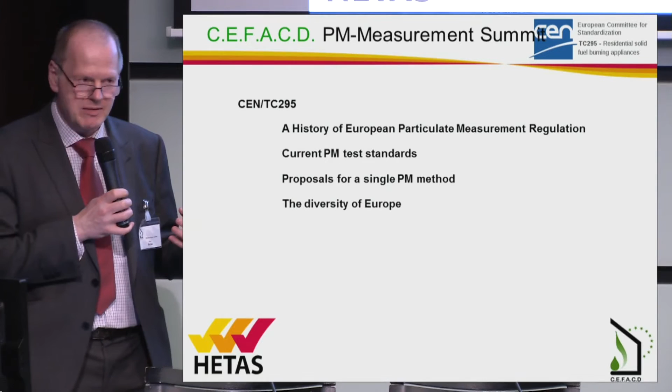This presentation is really a look at where we've come from to the stage where we are with standardization at the moment, and why we've got so much diversity in the methods that we've currently got, and how we can move forward towards a single method and the challenges that are being presented to actually get a single method.

So I've looked a little bit at the history of regulations across Europe. I've asked for feedback from, we have 3 national methods, the UK, German and Norwegian, so we've had some feedback from members from Germany and Norway on theirs. I've a lot more information about UK because I know UK in a little bit more detail.

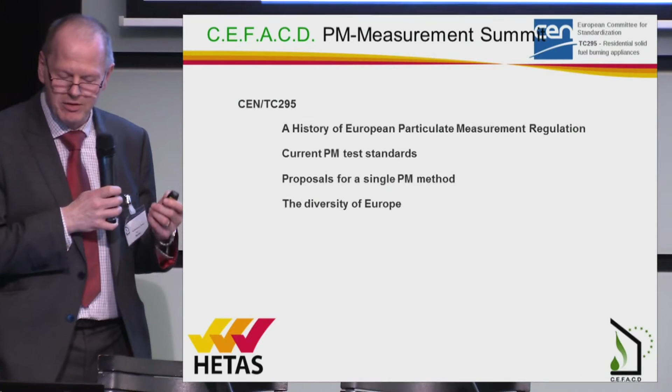But from the national regulation side in the United Kingdom, we've got probably a lot of history going back on air quality problems and actual regulation of air quality, to the point that this isn't something new, even though we've looked at the slides just a few minutes ago from Marlon, which showed from the 1970s some massive improvements.

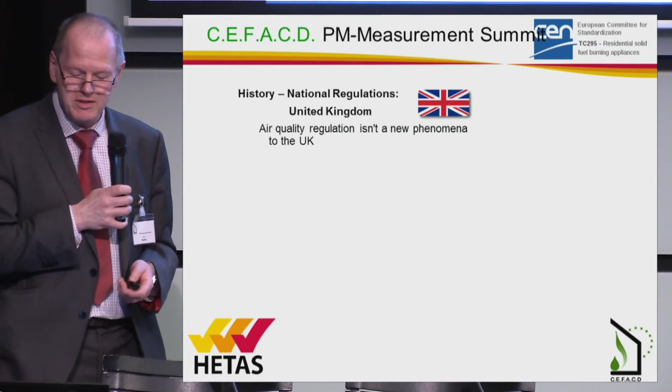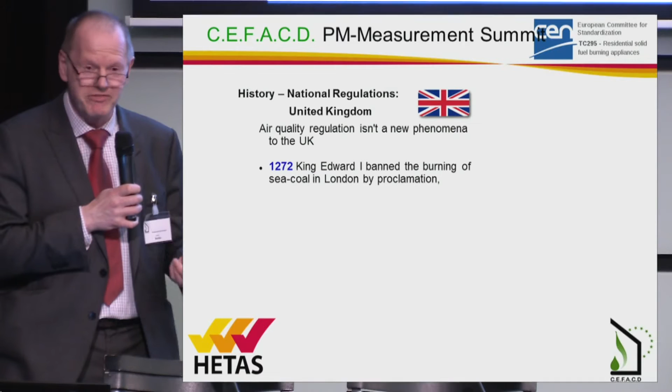The first regulation I found in the UK actually dates back to 1272, when King Edward I banned the burning of sea coal in London because of the really acrid and nasty smells and burning lungs that people were getting from the emissions. Sea coal was basically coal that was brought down from the north of England from coal seams that had been exposed by coastal erosion, and it was very tarry, bituminous coal. So that was the first regulation that we can find on air quality.

We then had some information coming from John Evelyn, who was an advisor to King Charles II in 1661, who produced a booklet, Fumifugium, or the inconvenience of the air and smoke of London dissipated. And this actually gave some very useful information that they should relocate industry out of the city centres and start planting parks and trees to clean the air, which reflects in a lot of the cities now.

They're not just concrete jungles anymore. They are quite urban parklands and avenues of trees that we see all across Europe, not just the UK.

The one thing he got wrong was that he suggested that burning of wood was less damaging to your lungs, particularly aromatic woods. What it was in those days, they could see black smoke and they could see a problem. What they didn't know was there was problems with invisible particulate that you can't see in the air, which is what we're now regulating down to.

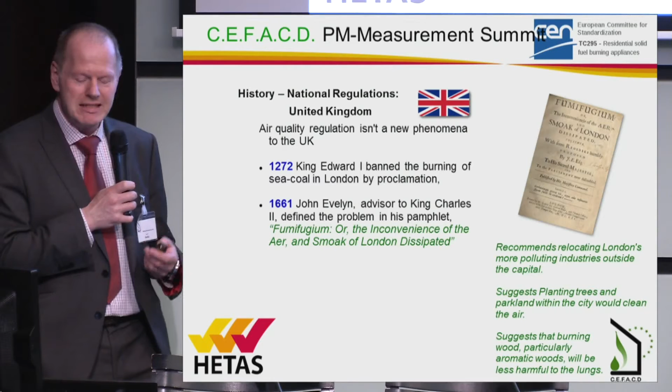You can't see what comes out of the chimney at the emissions levels that are being tested for throughout Europe at the moment. And also in 1853, with the development of technology, the Marquess of Lansdowne brought in the Smoke Nuisance Abatement Metropolis Bill, which was basically that all furnaces should consume their own smoke. And this was after researching the development of down burning, so it wasn't just basic burning in furnaces and fireplaces anymore. They were requiring some technology.

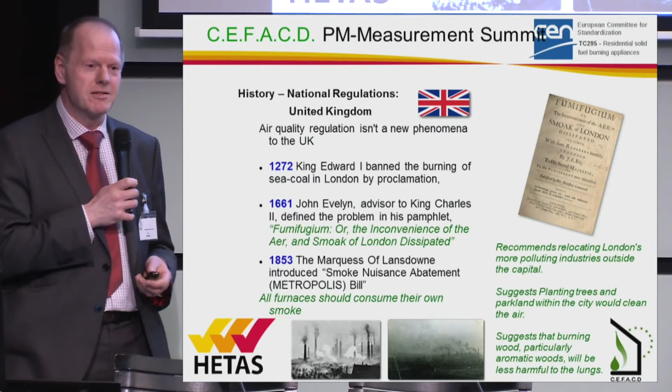So it hasn't all advanced since 1970. There was work being done previous to that.

We'll look at the national regulations of each of the 3 countries. And in the United Kingdom, before we go on to that, we suffered a devastating period in 1952 where over a lot of England was a weather inversion which held the pollution down closer to the ground level.

That mixed with moisture and damp in the air, and it was a time when we had masses of coal burning. All domestic heating was mainly open coal fires or very early stoves, which were just a box with primary air. But we had the situation where the air became so polluted during these smogs that literally thousands of people were killed during the smogs.

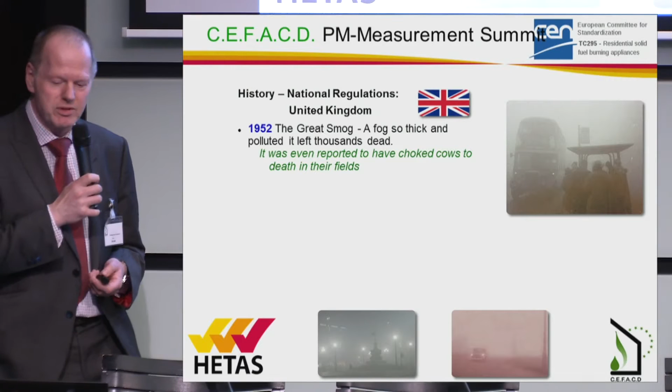It was reported that even cows in the fields around London choked to death. The air was that bad. But that prompted us to introduce the Clean Air Act in 1956.

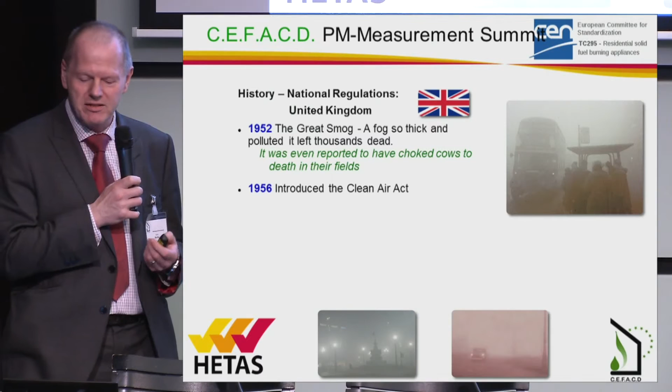And on the back of the Clean Air Act, which was legally binding across the UK, we introduced a requirement where you weren't allowed to emit dark smoke, so only white or light grey smoke. But it was still a visual situation. They were still talking about smoke you could see.

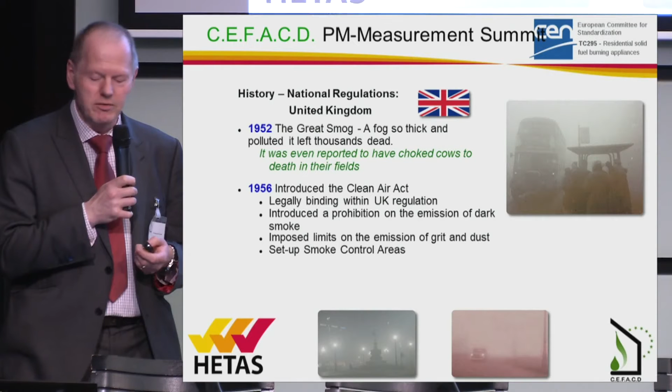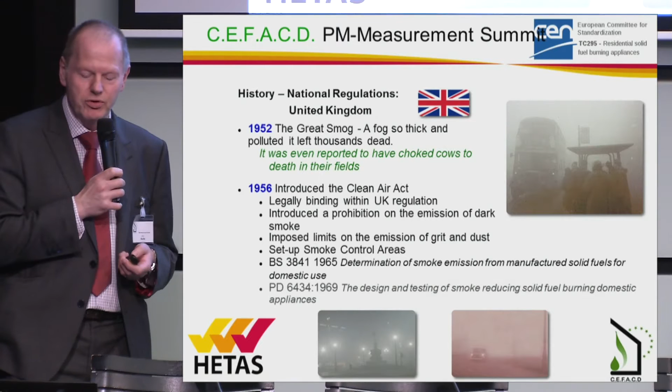There was emissions of grit and dust imposed on what could come out of appliances. Set up smoke control areas where there was tighter regulation on all combustion appliances, and it prompted the development of two standards in the UK, 3841 and 6434, which set out how you actually tested an appliance.

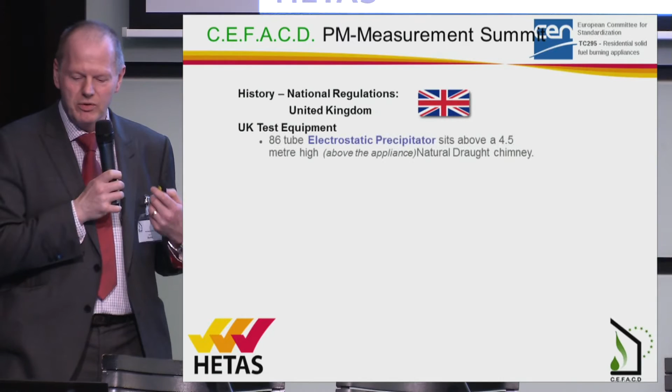And these were simply, after research of equipment, they chose as the primary method an electrostatic precipitator taken from the chemical industry, because it was known to have very high capture efficiency and capture a lot of the pollutants coming from chemical plants. Some of the really nasty stuff was being used.

It was sitting on top of a 4.5 metre chimney, and at the top of the chimney, because of the thermal mass and the air leakage through a typical ceramic British chimney, the temperature had dropped to around 80 or 90 degrees before it entered the precipitator.

So it was capturing a good portion of the condensed hydrocarbons, the volatile organic compounds that are gases that don't condense until the temperature's low enough to form organic particles. And the efficiency of it was around 97 to 99% efficiency, so what's coming out the chimney is being caught, and it gives you a very good reflection on the appliances.

The limits that are set in the UK reflect the fact that you're capturing all of the smoke, not just a sample of the smoke. And there's also an optical trace which tells you when the smoke is being created within the combustion cycle, giving you a graph of where the smoke is created.

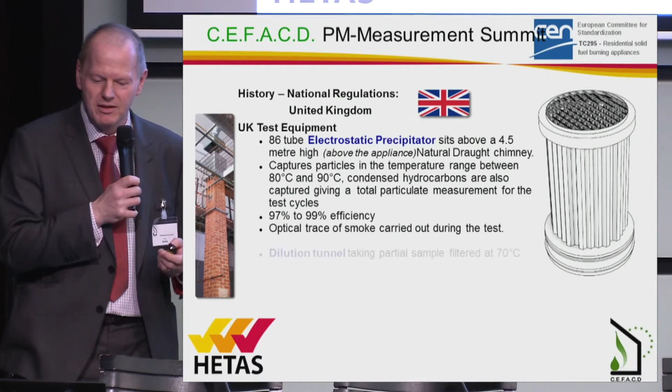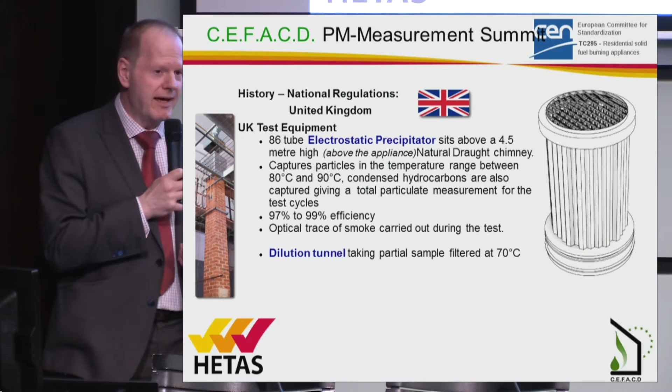There is also a dilution tunnel in the UK that's used, that takes a partial sample of diluted air, and the filter housing is maintained at 70 degrees, but the air is diluted down colder than that through the dilution tunnel. It's isokinetic because you can have higher velocities in a dilution tunnel than a natural draft chimney, so you're sampling relative to the flow of the exhaust gas going through the chimney, and the results are fairly comparable between the two methods. So either will satisfy the UK smoke control requirements.

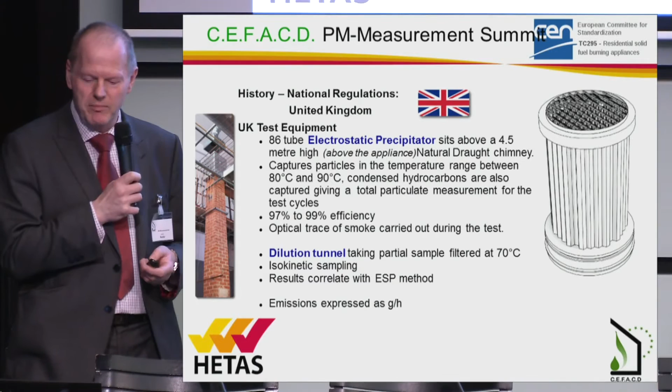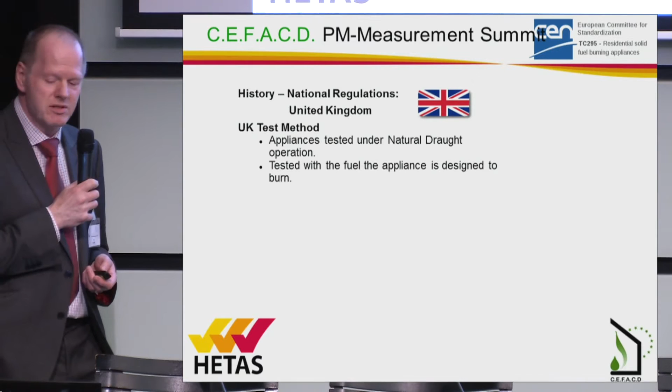The method we use to test the appliances is they're tested under natural draft operation, with the fuel that the manufacturer declares the appliance to be used with. So if it's a logwood fuel, it's tested with logs, and it's tested at the maximum output the manufacturer declares — the fuel load they say is the maximum for the output of the stove.

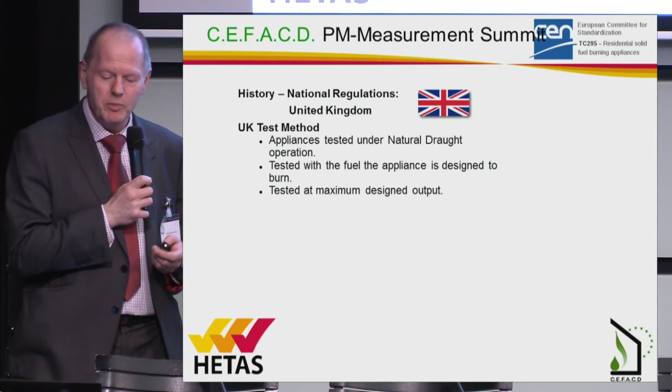But we have a culture in the UK of trying to outdo our neighbours. We live in relatively modest housing because we've got an awful lot of population in a small area. So most of the houses are fairly small, but the culture is to have as big an appliance as you can, for a nice big glass front on it, and something that looks better than your neighbour's got.

So there's almost always an oversized appliance fitted, which means they're usually operated at a very low turn down position, and if you have your air too low for the fuel that's in the firebox, you create a lot of smoke. So the requirement under the Clean Air Act is that you have to test them at the physical minimum position that the air can be set for the stove, making sure at the minimum setting you've got enough air to maintain the clean combustion that the Clean Air Act calls for.

If during the testing process you're fairly near the limits, you then have to do an abuse test and put even more fuel in and do the tests — so you're overfiring the appliance as well. And to get some degree of repeatability, they actually do 5 tests of each of the firing conditions, so it's not just a one-off freak result giving you the results. There's some robustness behind the testing.

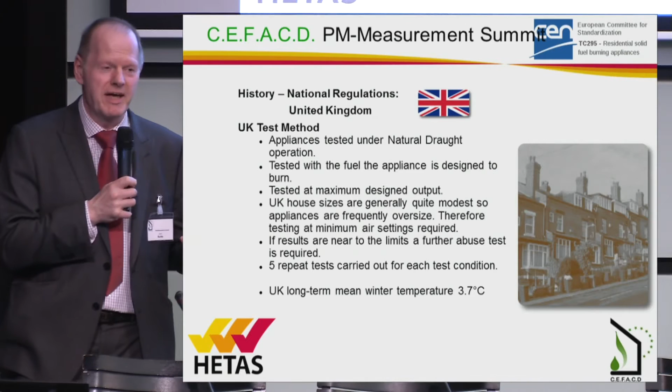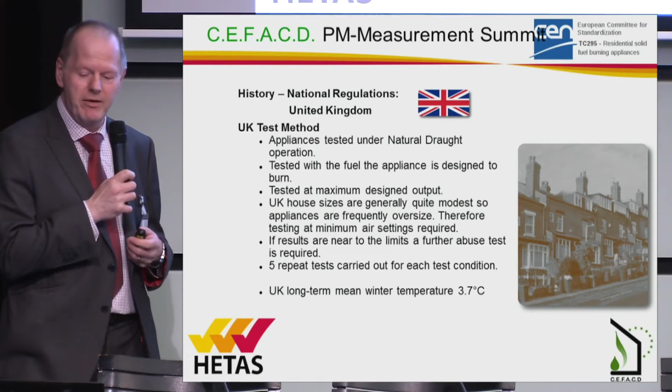The other thing to consider in the UK is that the mean winter temperature is roughly 3.7, almost 4 degrees as an average temperature. So the heat loss from the houses, internal to external, is quite modest. You might be looking at 14 to 18 degrees temperature difference between inside and out, which plays a big bearing on how the appliances are used. So, I've got a fair bit on the UK.

The other national measure methods — we've got Norway, and I've got to thank Morten from SINTEF for sending some information through on this.

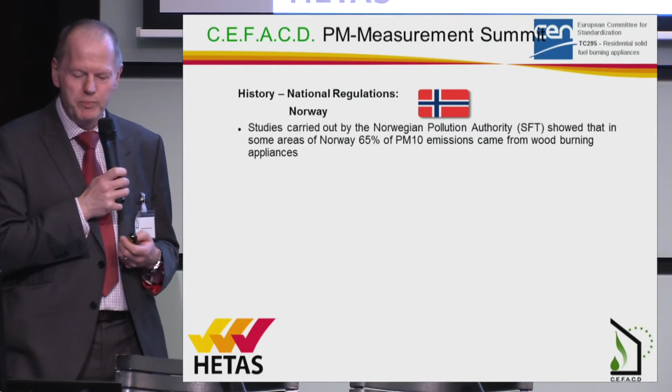Their pollution control requirements were brought about after research, possibly in the 1980s, which was showing that in some areas of Norway, wood burning was attributable to around 65% of the total particulate PM10 emissions. And that prompted their Environment Agency to do a study of what test methods were available around the world that they could adopt in Norway for testing the appliances.

And after a fairly involved study, they settled on the American test method. I can't remember the name of it, but it was settled on because it used a dilution tunnel, and they felt the results showed the emissions coming out the chimney more realistically than other methods. They probably didn't look too deeply at the English one, which also tests what comes out of the chimney. But it was felt to give fairly real-life emissions of what comes out the chimney under those specific laboratory conditions, not the conditions that happen in reality.

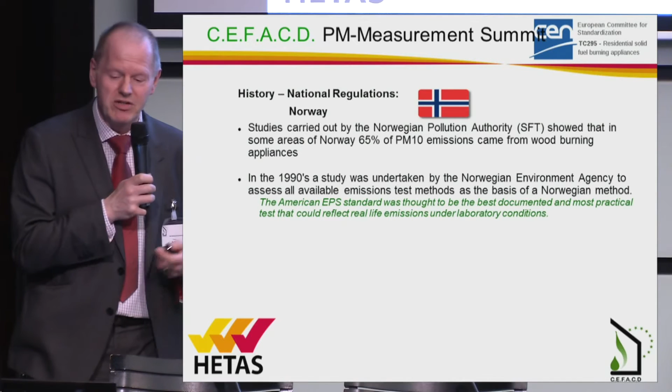There was a change to the American standard, in that the fuel load was changed slightly — whether it was the mass of fuel or the size of the cut logs, the cut sections used within the firebox — changed a little bit from the American method.

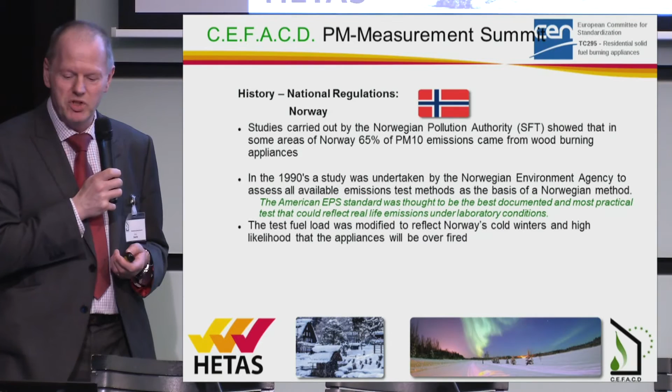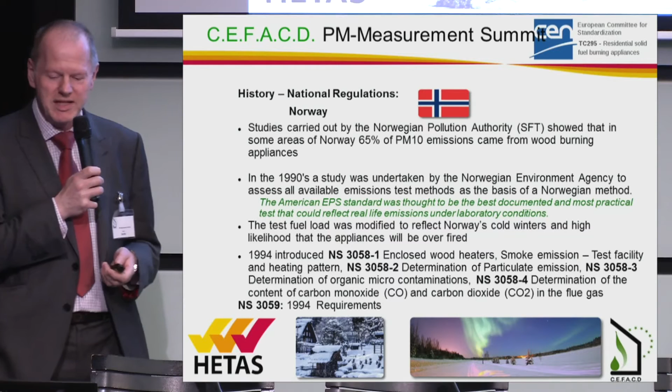The reason for modifying the fuel load was that in Norway you have much colder temperatures, so your heat demand is much higher than in the UK. But the research prompted two standards, the Norwegian standard 3058 and 3059.

While I was looking for typical winter pictures of Norway on the internet, I stumbled across far too many pictures of semi-naked men rolling in snow outside saunas, but thought better not put any of those on the screen.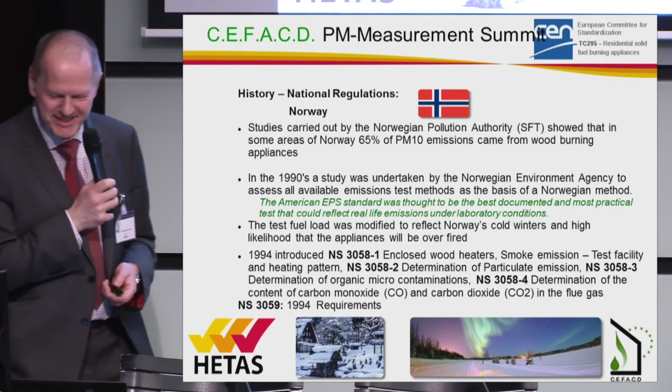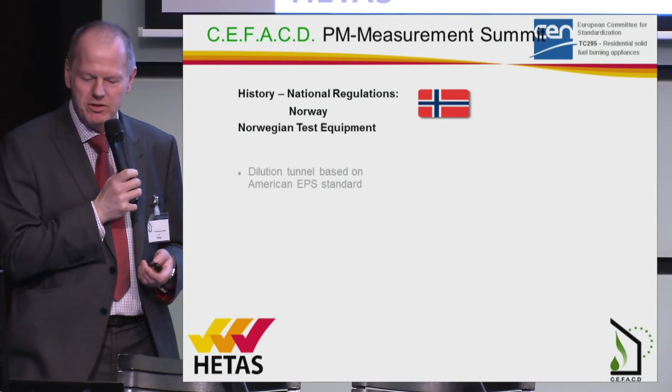Not yet, no. The test method used in Norway is based on the American dilution tunnel. The air comes out of a 4.5 metre tall chimney, then gets diluted down, possibly a factor of 20 to 1. I'm not sure exactly what the dilution factor is, but there's a large dilution of ambient air going in with the flue gases, which promotes condensation of the volatile organic compounds.

They then take a sample isokinetically, because at high volume the sample going into the sample probe is at the same velocity as the smoke and dilution air going through the dilution tunnel. So they know they're sampling realistically from what's in the tunnel, including condensed hydrocarbons that have condensed to particulate, as well as the dry dust and grit from the inorganic materials.

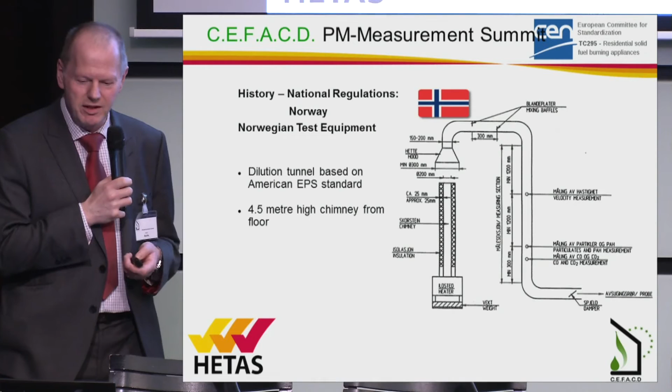The chimney is 4.5 metres high, but unlike the UK chimney, which measures 4.5 metres from above the firebox, the Norwegian chimney sits 4.5 metres from the floor, so it can affect the draft, probably giving slightly lower draft than the UK method. It's isokinetic, as I've mentioned.

The results from the Norwegian test are expressed in grams per kilogram. So if you know how many kilograms or tons of wood are being burnt in an area, you can get a rough idea of the emissions you'd expect. In England we use grams per hour, so if you know how many stoves of what size are in an area, you've got a rough idea of the emissions going out to atmosphere.

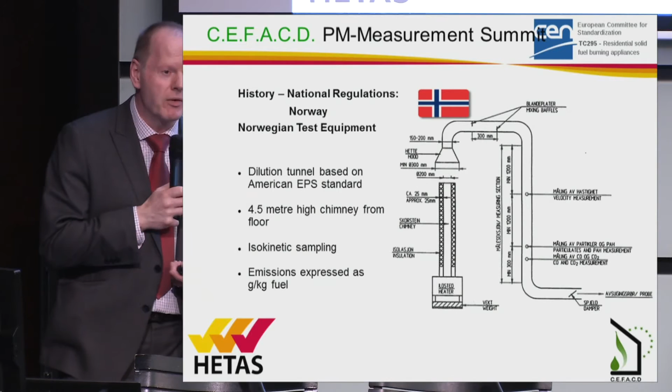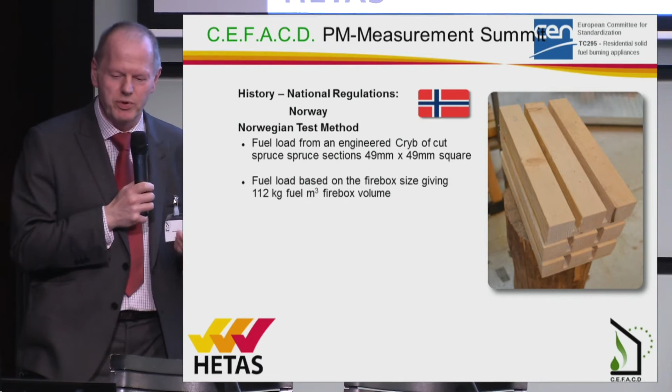The method differs significantly from other methods in that they use an engineered crib of spruce, cut into sections 49 millimetres square, which fill the firebox to an equivalence of 112 kilograms per cubic metre. This gives a very big surface area, and uses spruce rather than hardwood, which is a fast burning fuel but one that's readily available in Norway.

Testing is carried out at 4 burn rates. As mentioned, temperatures in Norway differ significantly from England and Central Europe, where the temperature difference from inside to outside can be possibly 60 to 70 degrees in the extremes of winter, so heat losses are far greater, and people are likely to overfire appliances well above what they've been designed to do.

So the crib takes account of that, but it's down to the culture and weather conditions in Norway that appliances are used differently than further south.

The average temperature is -3 to -15 depending on where you are in Norway, and extremes can be -40 or -50 for prolonged periods, several days at a time. Not conditions I'd like to work in, or to live in rather.

Appliances not using a representative fuel load that the manufacturer wants the appliance used with are graded into 2 grades, with 4 tests at different fuel loads and outputs, and you either get a grade 1 or grade 2 to pass their requirements. Their emissions limits are set specifically around that firing pattern.

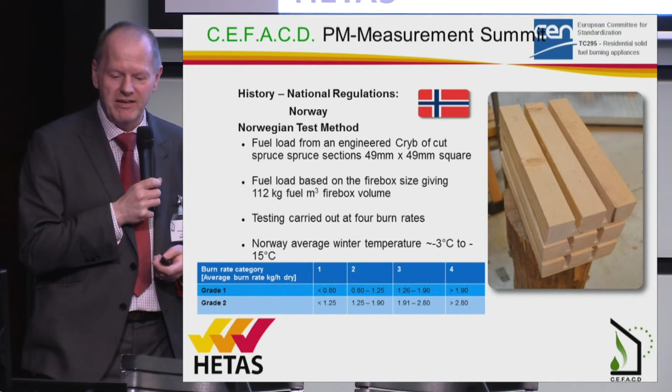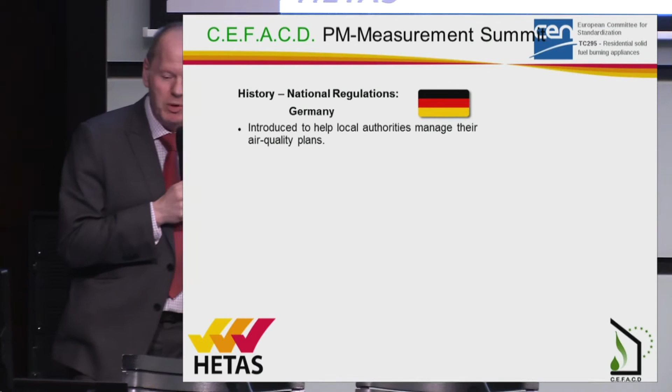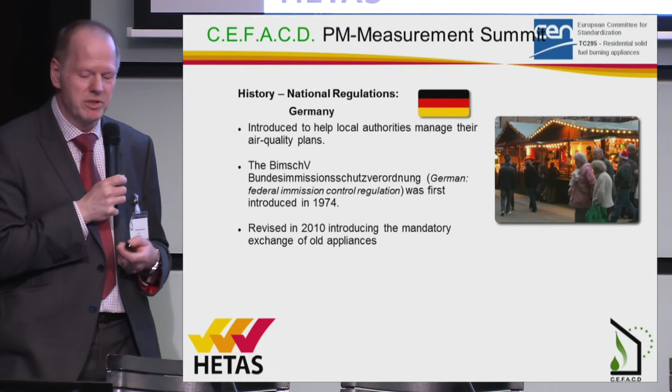The BImSchV was revised in 2010, introducing step changes over the following few years, bringing in a mandatory requirement to exchange old appliances. They found from testing that newer technologies are significantly cleaner than anything currently installed, so replacing old appliances is the most obvious way of improving air quality.

The emissions limits have also been tightened from the original limits. The second phase was introduced on the 1st of January 2015. The current limits are equivalent to eco-design limits using the heated filter PM method, and OGC, and so forth.

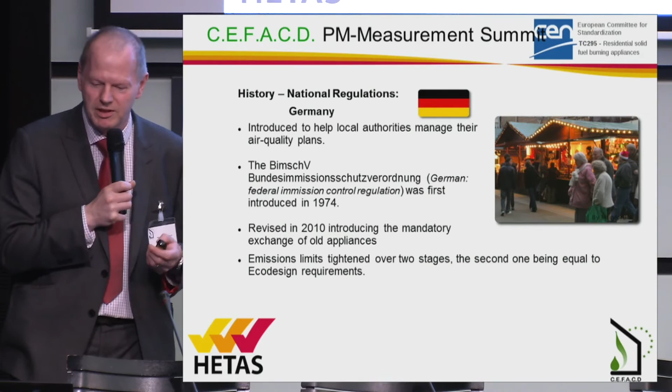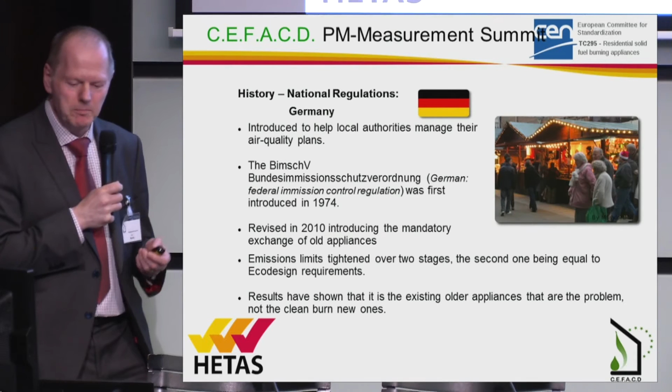So it was the older appliances that need exchanging, not the new appliances which are made to the newer technologies that are the problem. The test method differs again significantly from the other two national methods, known by us as DIN+. I'm not sure whether that's the right name for the test method.

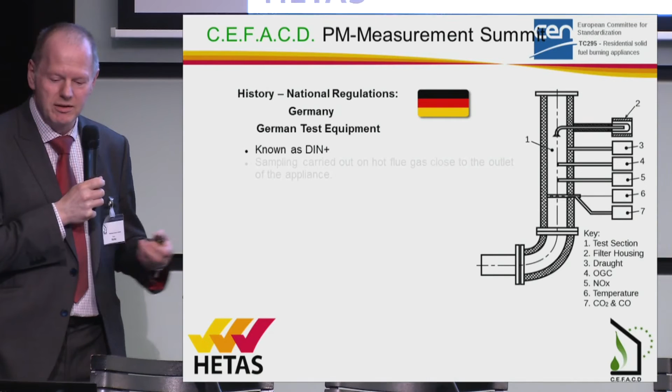I've not managed to find the actual test itself on any website, but it's basically a test that's carried out at the back of the appliance on the hot flue gas. So the filtering is done pretty much at the temperature of the flue gas coming out the appliance, and it's sampled at a continuous draft pressure of 12 pascals rather than natural draft. I believe that's done to give more repeatable laboratory results rather than having different chimneys in different laboratories giving different draft conditions, which makes it very difficult to do comparative testing between laboratories.

It uses a gravimetric sampling with the velocity in the sample probe being higher than the velocity within the chimney. So it captures smoke, but not necessarily relative to what goes up the chimney, but the capturing then gets drawn through the filter rather than settling out in the suction probe itself. So there's some advantages with having the higher velocity within the suction probe - you're getting more on the filter than what settles out.

It means cleaning is easier at the end of the day at the laboratory. But measurement is started 3 minutes after the fuel load is put into the firebox, to give the fuel load a chance for flame breakthrough and to start burning properly. And then it's continued for 30 minutes under steady state. And again, there's reasoning for this in the methods that happens in Germany.

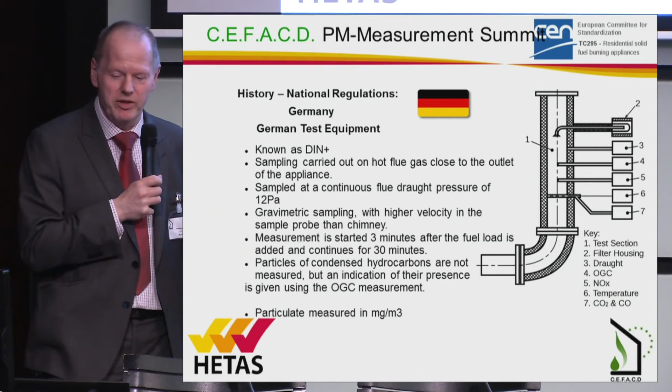The measurement method, or the recording method of the particulate, is carried out in milligrams per metre cubed. So to be able to use the measurements, you need to be able to work out how many cubic metres are coming out of a chimney, to work it back to the volume in an hour's use of a chimney, or whatever other methods are used for comparison purposes. So we've got three different methods that we need to compare against each other using different methods of recording the emissions.

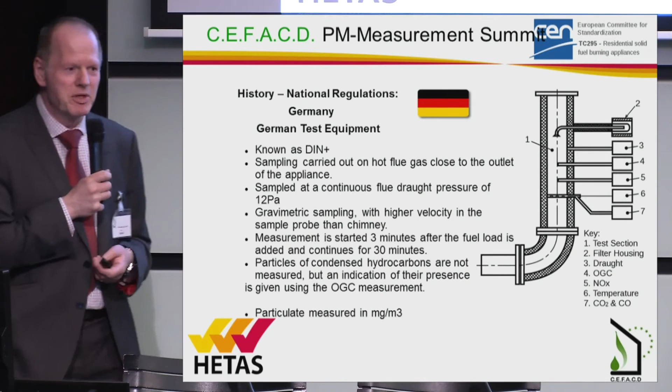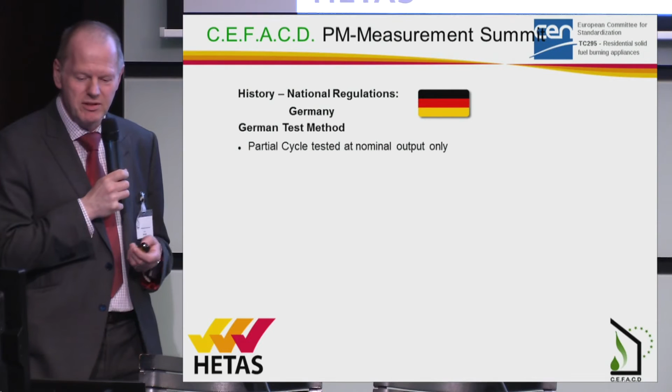The method in Germany differs again. It's the partial cycle test, as I've just mentioned, but Germany is regulated much closer than other countries by their chimney sweeps. In England, we fit appliances that are generally oversized because we like the look of the appliances. In Germany, the chimney sweeps will carry out a heat loss calculation and insist that the correctly sized appliance is used, which then reflects in the fact that the appliance is probably going to be used at the right output.

So the chances of the sort of abuse of underfiring in England, or the need to overfiring in Norway, are much less. So you'll have an appliance being used nearer to the design specification of the appliance, simply from the culture in Germany. And as I say, there's big cultural and temperature differences that affect the standardisation.

That means that the type testing that we've done under the construction products regulation, for doing comparison of appliances, means that the German particulate measurement shows that you're getting very clean appliances, and you can rank them in order of cleanest to dirtiest. What you can't do is say what's coming out of the chimney, but then there's always an uncertainty with all of the methods, and the numbers are always different between the tests.

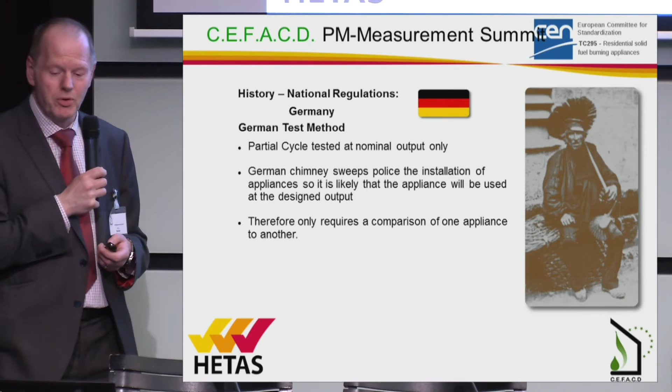And the other advantage of the method is that the equipment is sufficiently simple and economical enough that manufacturers can have their own test rigs. So as appliances are becoming more technical, the manufacturers can basically do lots of tests themselves, instead of having to pay premium prices for a notified laboratory to do development tests, which with the other methods it's quite expensive to set up - a dilution tunnel in a factory laboratory, or an electrostatic precipitator operating at 10,000 volts isn't something that you want everybody playing with, because they are quite dangerous in the wrong hands.

And again, the mean winter temperature in Germany - there aren't good details on the internet about that, but it's circa 3 degrees - so the heat loss isn't massive compared to the very northern hemisphere, or the very northern limits of the European area.

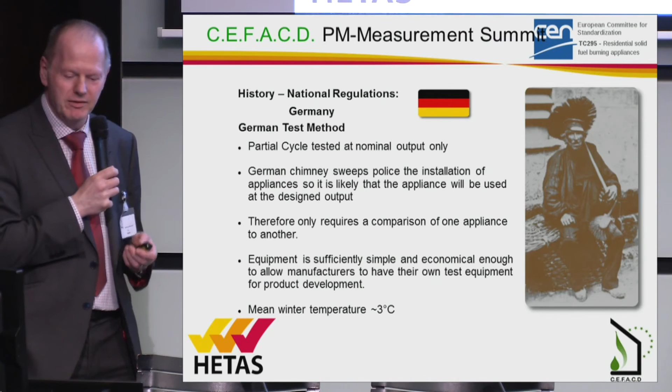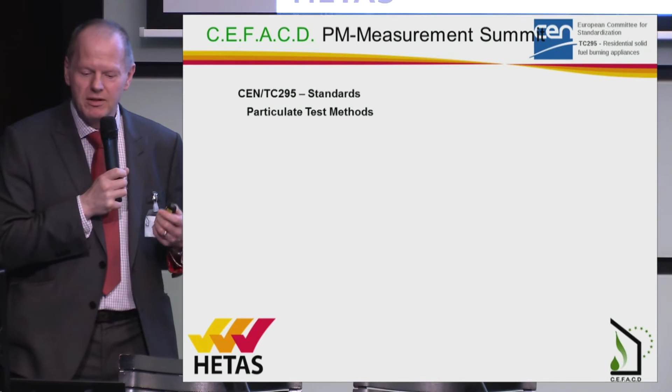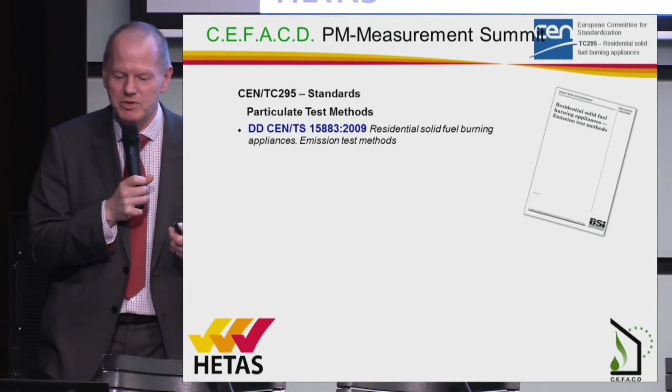So they're the national methods. So where are we with the standards at the moment? Those methods are reflected in CEN TS 15883, a specification that was being developed as a draft document to try and bring together the national methods.

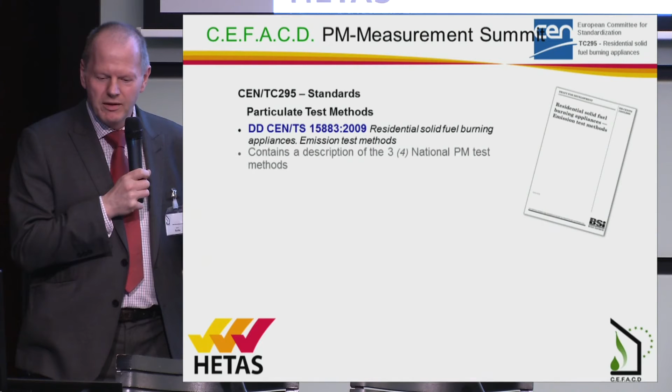We've got the 16510 series of standards, which were in development. They've now been voted through with a positive vote. The new standards contain 2 parts. Part 1 is the general requirements, and Part 2 sections are each of the technologies. Parts 2-1 to 2-4, which cover inset appliances, room heaters, boilers and cookers, have passed the final vote, and they're in the stage of being finally edited before publication.

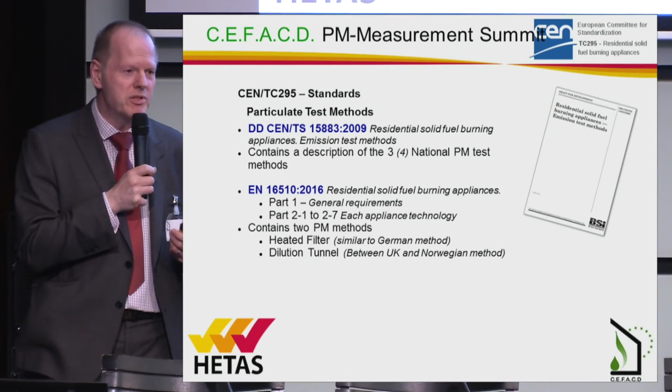They contain 2 PM methods: one is heated filter and the other is a dilution tunnel. The UK have effectively said the electrostatic precipitator is only available in 1 laboratory. It gives equivalence to dilution tunnel. So as long as the dilution tunnel method is available, that suits the UK, which would be happy to go without imposing an ESP on the whole of Europe.

But the requirement is still there for a dilution tunnel, because that marries in with the volume of emissions that we record in the UK coming out of the chimney. I believe Norway, though their test methods are different—I'm not sure whether that's acceptable to Norway or not—but given time and development work, it should be acceptable within Norway.

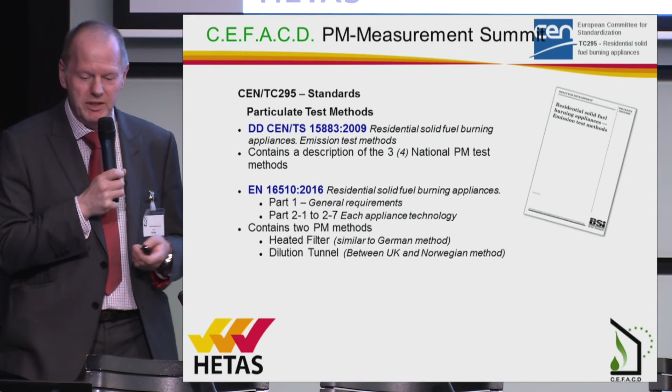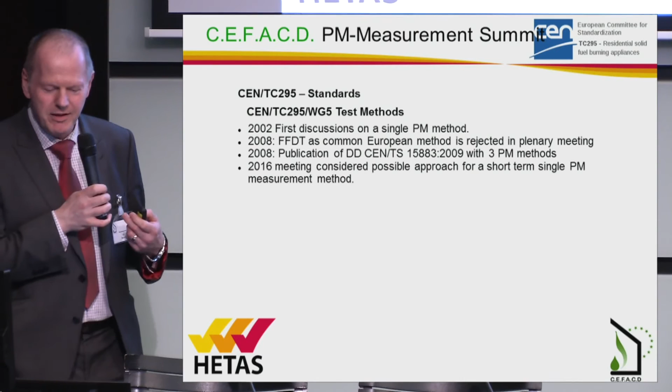The development of a single test method has been ongoing for quite some time. I've used some of Eric's slides from the last Working Group 5 meeting. It was first discussed in Working Group 5, which looks at the test methods, in 2002.

There was some work done between 2002 and 2008 to try and develop a single method, and there was a method put forward by Christian Gaegauf for a dilution tunnel method that they were hopeful would become a single European method, but it was voted out at the final stages of that process because it didn't reflect all of the different methods happening in Europe.

That year they also finalised the technical specification, which gives the national methods being used at the moment. Then in 2016, March this year, we had a meeting to discuss how we can look at the eco-design wish, and really it is a manufacturer's wish as well to have a single method.

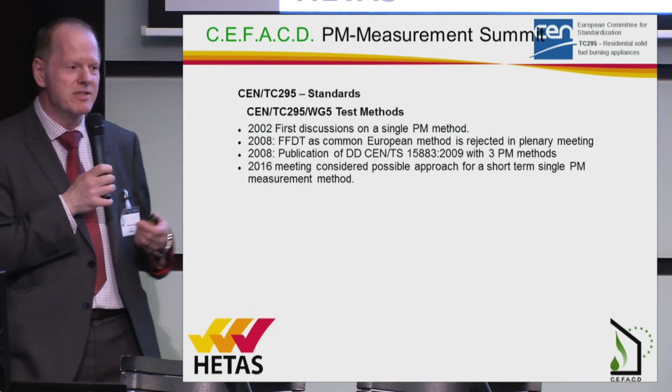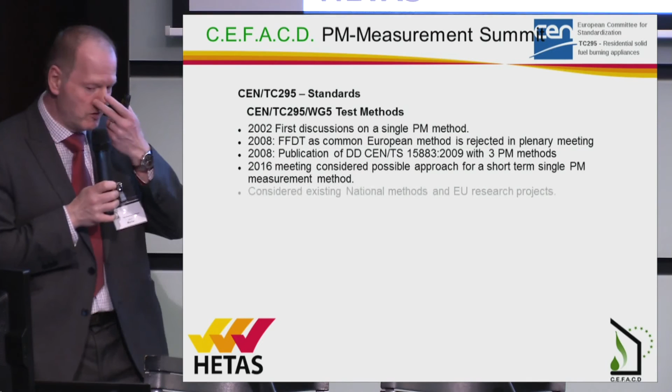Having to test 3 different emissions methods for a single appliance so you can sell it in different areas of Europe is an expense that is very difficult for a manufacturer to sustain. So a single method is wanted, but the meeting was called to discuss how we can go forward with that.

There was some discussion of the existing national measurement methods and some discussion of the research programmes going on in the background through the European Commission. There's a project coming towards its final conclusions now called the beReal project, which looks at an extended cycle of testing.

It's quite an elaborate method, again using a heated filter, but what they're saying in that programme is it gives more robust data because it's done over lots of cycles. There's also a test—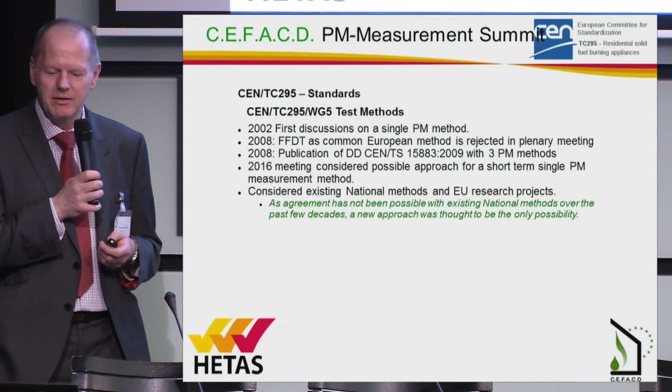not a test method, but a sampling method programme called EN-PME, which is looking at ways of more reliably sampling particulate coming out of the appliance. One of the discussions that came about was, as a technical group looking at appliances and how they're made, should we be looking at what comes out of the chimney or what comes out of the appliance?

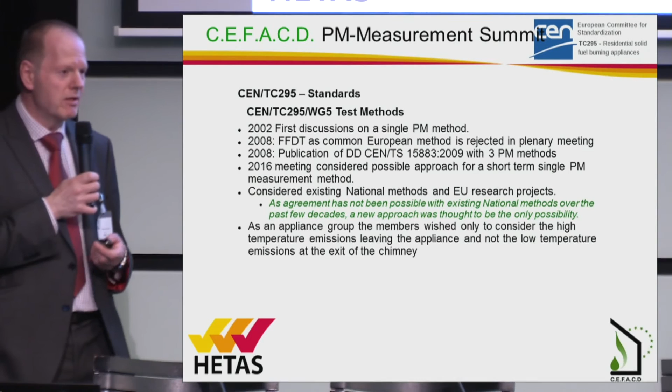There was a good group of people within the group that wanted to restrict it to what comes out of the appliance. That again reflects back on the heated filter methods, because you're doing it at the high temperatures out of the appliance and giving an indication with OGC that there will be condensed particulates.

The EN-PME test, because it's different, and we haven't managed to get agreement on any of the national methods to go forward as a single method, it was felt that a new approach was really the only possibility to try and get an agreement.

So the members went forward with promoting EN-PME as a means, as a basis of a start of how to sample, different to how we are at the moment—something that has the potential to be more repeatable from one type test to another, which is very important with regards to the development of the stove in the manufacturer's laboratories, then paying for a type test and then being market surveillance checked.

If there's big variations in results from one test to another without any change to the appliance or fuel, then there's big problems when you put the product on the market and it becomes a market surveillance issue. So the conclusion was that we should investigate EN-PME together with the method of firing the appliance and whether that could be adopted in Europe as a single method.

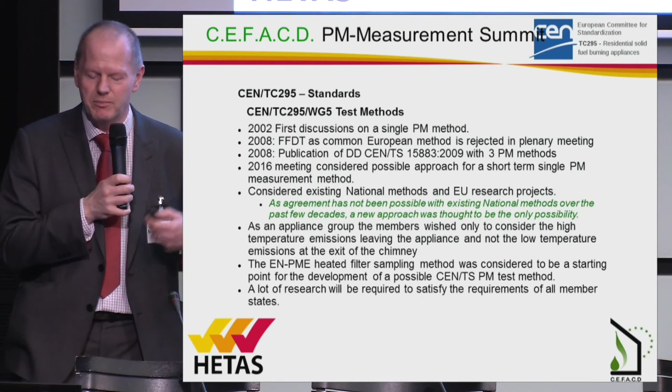A lot of research will be required. It isn't a finished project at the moment, so I can't see it being a very quick process to just go from the EN-PME research straight into a test method, but that's one for the TC to work through.

Of the difficulties we're going to have to face, we've got the diversities of both weather and culture across Europe that need to be accounted for.

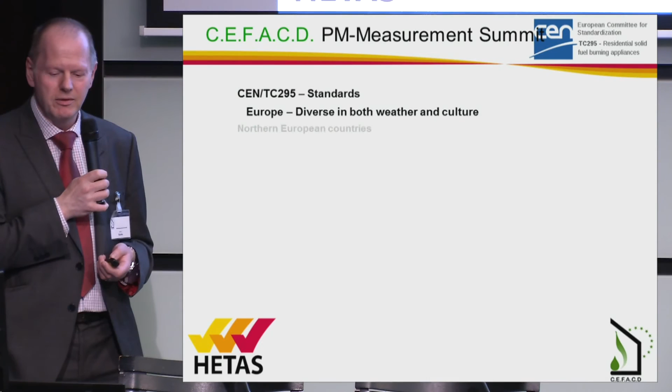On the slides we've seen that Norway needs to account for overfiring their appliances because of the phenomenally cold temperatures they have for periods of time during the winter. Not the average, but the peak temperatures that their appliances under normal use just can't cope with, so they overload them with fuel. They try and get more heat out of them. And also their emissions inventory is based around what comes out of the chimneys, so they need to have a test that can give them some reassurances that the numbers will match up with their emissions inventory.

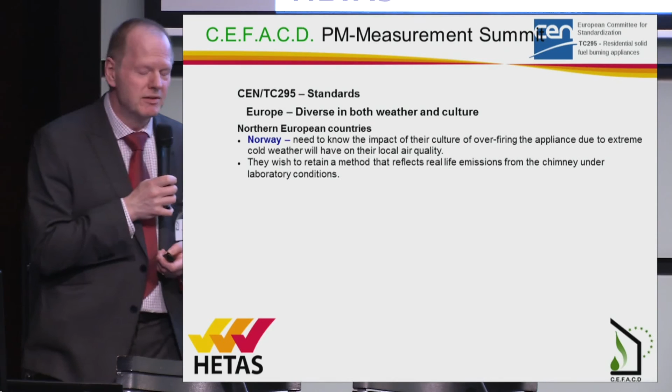The mid-European countries and the UK, similar reasons. We've had our smogs that have killed thousands of people. We've got it right since then with regard to, other than the growth in diesel cars, the air quality has improved significantly through the Clean Air Act and the methods that we've got in the UK.

Again, our emissions inventories were roughly based around some of the research done into the methods that we use in the UK. So the UK have made it clear that the full flow dilution tunnel needs to be able to correlate with any heated filter method, so that hopefully we could apply a factor to a heated filter method with the heated filter and OGC and know roughly how it will affect our emissions inventory.

And we have to account for the fact that in the UK we oversize our appliances and use them turned right down, totally the opposite to Norway. Cultural change again, and we have slightly different weather conditions.

And Germany, they regulate to make sure the right size appliance is fitted, so it's almost inevitable that most of them will be used in the manner that they were designed to be used. So they need to just compare appliances. They need to know which are the best. And they've already proven that the better appliances have had a massive impact on the emissions that come out of them.

So is that approach acceptable across Europe? Do we need heated filter? Do we need dilution tunnel? They're still open for debate, but we're working through that in Working Group 5 to try and get the final result. And then we have to consider what happens with the southern European countries.

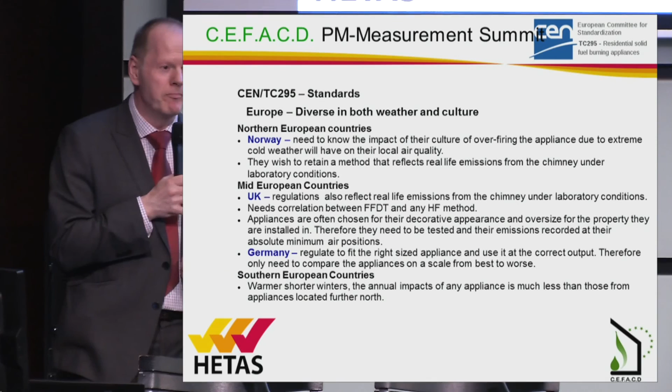In the regulatory committee, they made a stance that they actually only use their appliances for a couple of weeks of the year. They use relatively cheap appliances. Do they need to go from spending 200 or 300 euros on an appliance that's hardly used, that has very minimal impact on the overall air quality, to having to buy appliances that might be 2,000 or 3,000 euros to pass the minimum requirements of eco-design?

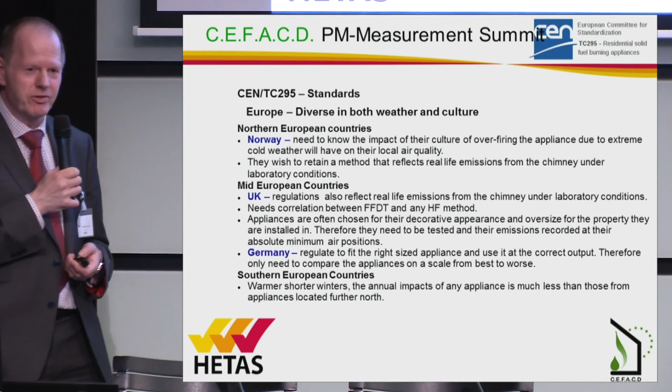And those arguments were put forward at the regulatory committee. So they have a stance where they want to have something far less robust, but the impact of burning an appliance moderately for a couple of weeks in the winter, as opposed to using it for 10 or 12 hours a day every day of the week for 3 months or more, are significantly different.

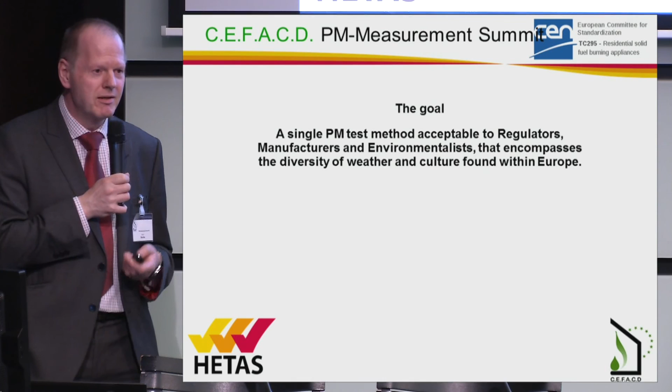So really the goal for TC295 is to produce a single PM test method acceptable to regulators, manufacturers and environmentalists, and it has to really encompass some of the diversities that we've got across Europe and be able to give reassurances to everybody that the method is robust and accurate.

And that method needs to be repeatable, because the manufacturers are no longer making simple appliances. They're quite complex. They need to have research laboratories of their own. So the equipment has got to be affordable for a moderately sized SME, small, medium-sized enterprise, to be able to afford the equipment to do the research, to make the appliances.

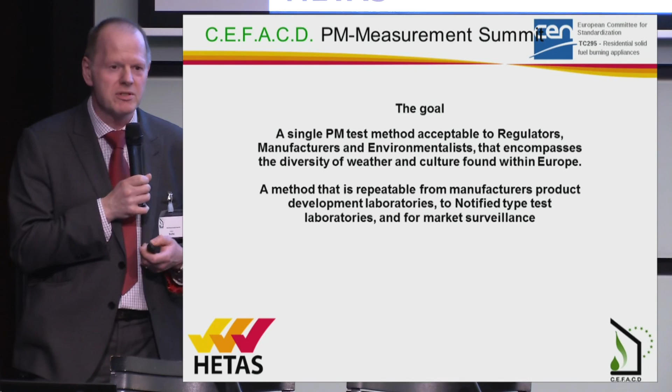It's got to be okay then to go from the manufacturer's laboratory and get repeatable results in the notified laboratories when they're doing the type tests. And it's got to be able to be used by the market surveillance authorities to make sure the appliances that are put on the market are of a robust enough nature and reflect the actual type test reports that were recorded. So we've been given a very difficult challenge, and really that's where my presentation ends.